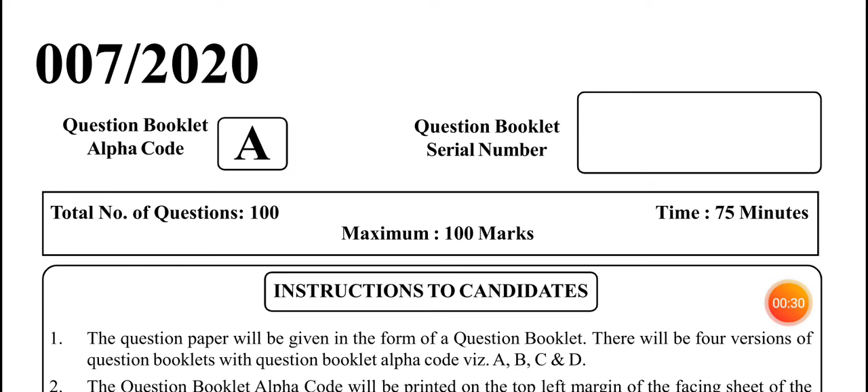ഇന്ന് നമ്മൾ ഡിസ്കസ് ചെയ്യാൻ പോകുന്നത് കേരള പി എസ് സി 2020 നടത്തിയ ട്രെയിനിങ് ഇൻസ്ട്രക്ടർ പ്ലംബിംഗ് ഫോർ SC ഡെവലപ്മെൻറ് ഡിപ്പാർട്ട്മെൻറ്റിലേക്കുള്ള ചോദ്യപേപ്പറും അതിൻ്റെ ആൻസർ കീയുമാണ്. ക്വസ്റ്റ്യൻ കോഡ് 7/2020. മെക്കാനിക്കൽ എഞ്ചിനീയറിംഗ്, സിവിൽ എഞ്ചിനീയറിംഗ് തുടങ്ങിയ വിഭാഗത്തിൽ നിന്നുള്ള ചോദ്യങ്ങളാണ് ഈ ചോദ്യപേപ്പറിൽ ഉൾപ്പെട്ടിട്ടുള്ളത്.

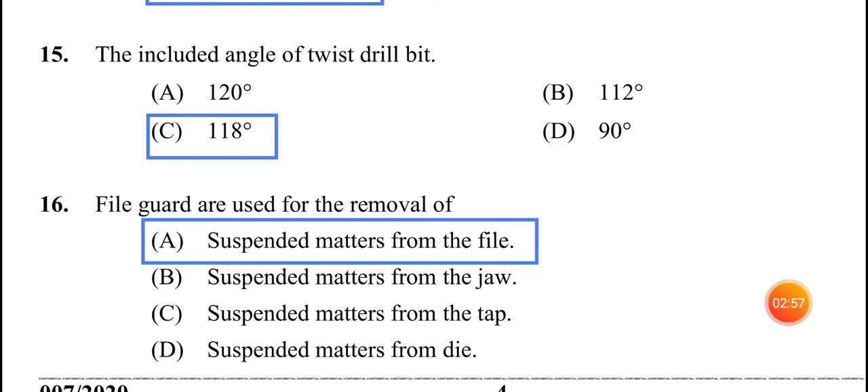16. File guard are used for the removal of? Option A, suspended matters from the file. 17. Hand taps are used to form the thread on? Option A, internal threads. 18. Socket is also one of the device of their? Option B is the right answer, drill holder.

19. External thread are cut by? Option B, die. 20. Mortise chisel is a? Option A, cutting tool. 21. Which tool is used for extracting nails? Option B, claw hammer.

22. Length of crosscut saw varies from? Option D, 600 to 650 mm. 23. Name the tool to measure the surface level of small area. Option A, spirit level.

24. GI pipe socket are designated by? Option C, nominal bore of pipe for which it is meant. 25. Lead pipe and copper pipe are cut easy with? Option B, pipe cutter. 26. PVC pipes are manufactured by using? Option D, polyvinyl chloride.

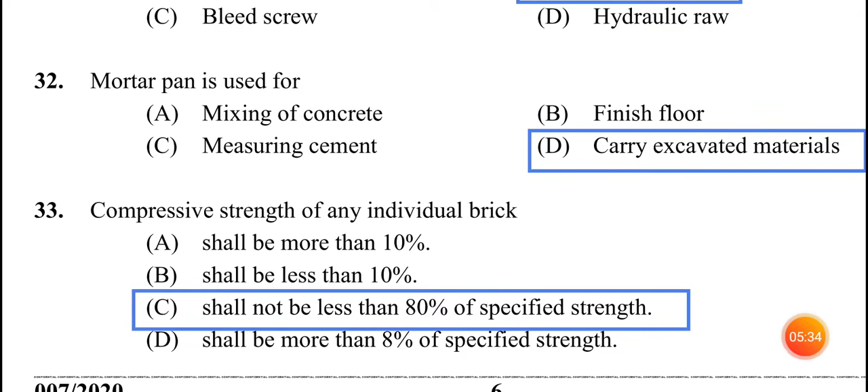30. T is used for: option A, branch off at 90 degree. 31. Every pipe bender will have: option B, inner former. 32. Mortar pan is used for: option D, carry excavated material.

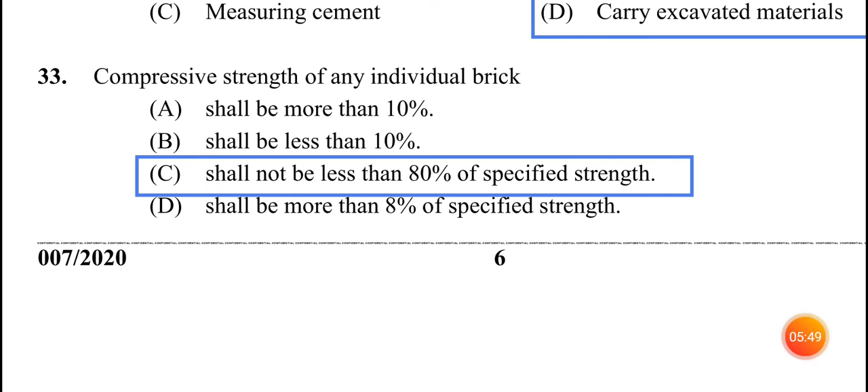33. Compressive strength of any individual brick: option C, shall not be less than 80% of the specified strength. 34. Cement concrete is: option C, good in compression. 35. While hand mixing of cement concrete: option B, cement and sand are first mixed.

36. Which tool is used for earth excavation, mixing mortar and mixing concrete? Option A, spade. 37. What type of bond is used for constructing curve and footing of foundation? Option B, header bond. 38. What is used for binding stone, brick, etc.? Option B, mortar.

39. To check straightness of brick masonry and plaster, which is used? Option A, straight edge. 40. Water absorption percentage of good brick of its own weight is: option D, not more than 20%.

41. Solder is an alloy of: option A, lead and tin. 42. What type of flux is used for soldering copper sheet, brass sheet and tin plates? Option B, zinc chloride. 43. In torch brazing, heat is applied by: option A, oxyacetylene flame.

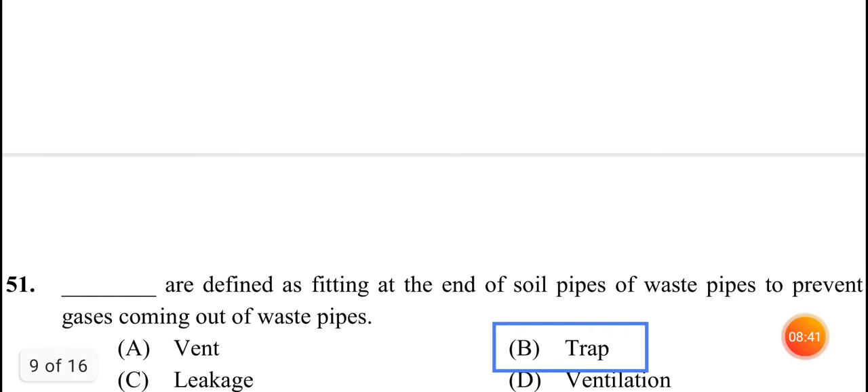Question 51: A trap is defined as fitting at the end of soil pipe or waste pipe to prevent gases coming out of the waste pipe. Option B, trap.

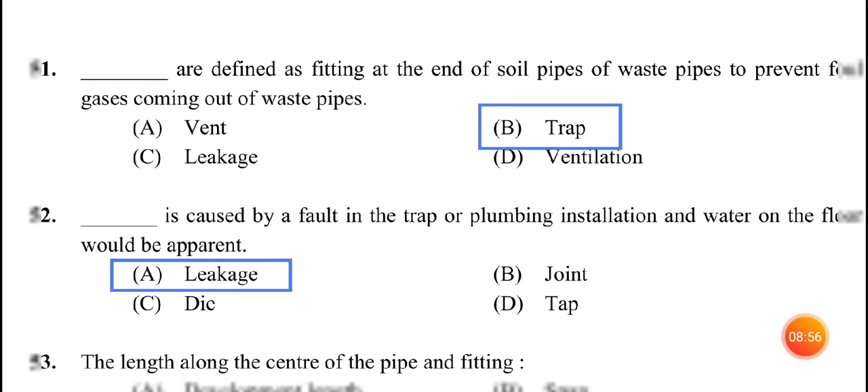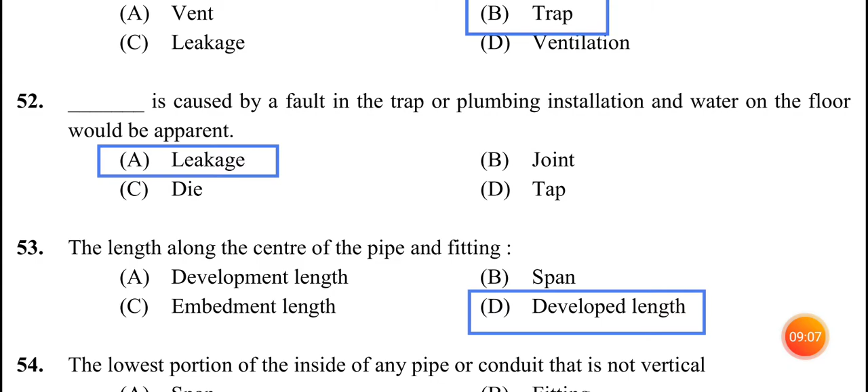Question 52: Leakage is caused by fault in the trap or plumbing installation and water on the floor would be apparent. Option A, leakage. Question 53: The developed length is the length along the center of the pipe and fitting.

Option D, developed length. Question 54: The invert is the lowest portion of the inside of any pipe or conduit that is not vertical. Option C, invert.